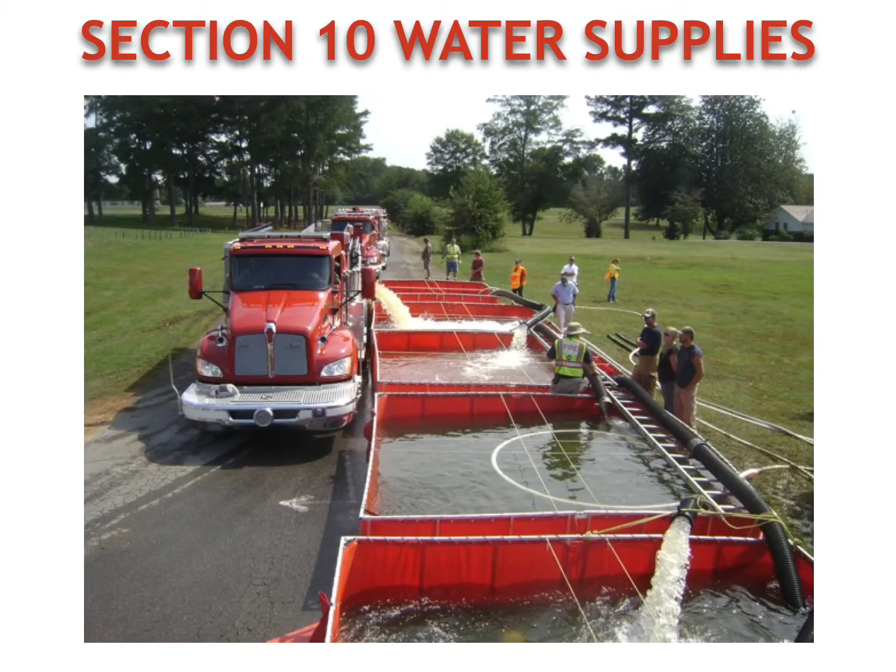Hello and welcome back to Granbury Volunteer Fire Department's online fire academy, and today we're going to cover section 10, water supplies per SFFMA. Again, I am Matt Hohan, captain of operations here at Granbury, and if you have any questions, make sure to write them down.

We're going to jump right into this slideshow. Let's take a look at your very first picture. This is a pretty serious water shuttle operation, and unfortunately, you're never going to see anything like this in Hood County. The best that you're ever going to get is nurse tanker operations, and the way a nurse tanker is set up is you have one dedicated truck that you're pumping from, and all the other trucks will pull up, offload their water to the nurse tanker, and then they'll depart to go refill.

It's been a really long time since I've seen drop tank operations here in the county, and maybe after discussion not only here in our rookie school but at our home departments, maybe we can pick this back up sooner or later. Without further ado, water supplies starts now.

Identify the water distribution system and other alternate water sources in the area of responsibility. So the first thing we're going to look at is this bottom right slide, water supply distribution system. And we're going to start at the source. And Granbury has two water sources. One, we have Lake Granbury, and two, we actually have city water wells outside of the city. That water from the lake and from the water wells is piped and pumped to the treatment plant. Once it gets to the water treatment plant, it is then piped and pumped to our storage tanks and throughout the system as a whole.

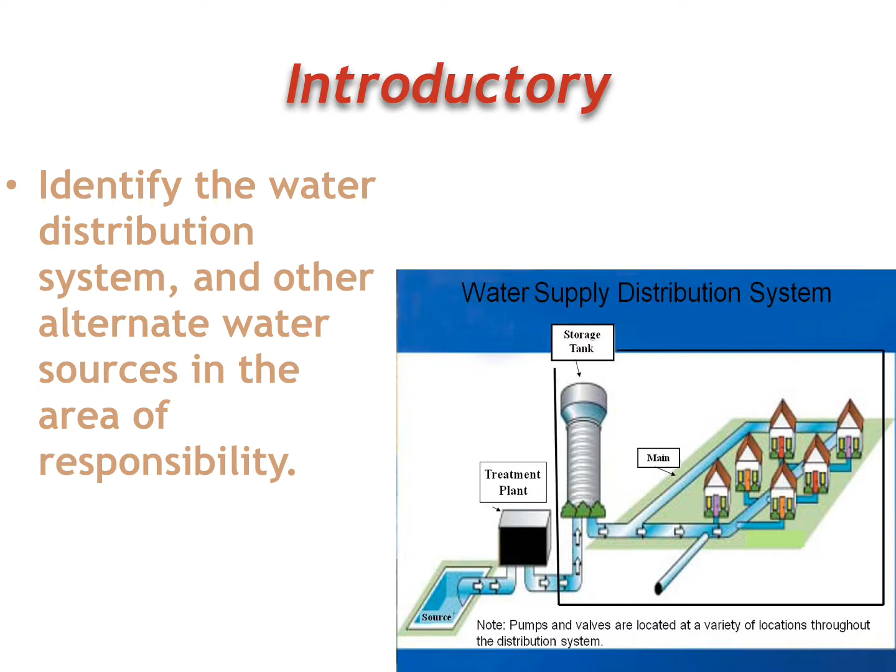Identify a dry barrel and a wet barrel hydrant. Now I'm going to tell you this, there's a major difference between a dry barrel and a wet barrel hydrant. One has a valve that is located below ground level, and that's going to be the dry barrel hydrant, and a wet barrel hydrant is going to have a valve that's basically operated at the top of the hydrant. And that valve is physically what opens and closes and allows water to come out of that hydrant.

And my question to you is, why do we have two different types of hydrants? Why does one have a valve that's buried in the ground, and why does the other one have the valve at the top of the hydrant? I want you to see if you can figure this out and write your answer down and come back for the answer.

The difference between a dry and wet barrel hydrant is freezing locations. Any place that has any potential of a freezing level in the ground, they will have a dry barrel hydrant. A wet barrel hydrant is primarily going to only be used in locations that don't freeze. Prime examples of the places I have seen wet barrel hydrants are Florida, very far south Texas, and New Orleans.

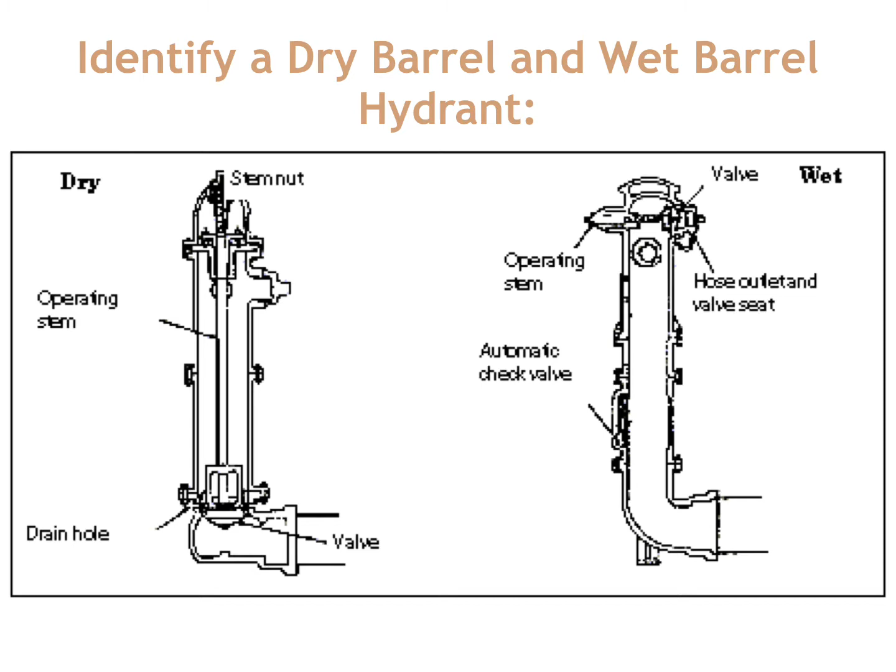Hydrant to pumper hose connections for forward and reverse lays. Okay, a forward hose lay is when the fire truck physically connects to the hydrant and then drives to the scene. So the truck pulls up next to the hydrant, a firefighter gets out, he grabs the hydrant hose, the supply line, and starts to connect it to the hydrant. From that point, the fire truck is going to actually finish making scene, and they're going to pull up in front of the structure. That is a forward hose lay.

A reverse hose lay is when the fire department pulls up on scene, they pull their hose off that they need, they pull the supply line to the scene, and then they send the fire truck down the road to the actual hydrant. Now, a split hose lay is best explained by looking at the bottom right picture. And you can see that you have two different fire trucks at the same intersection. And the purpose of this is one truck's going to be at the hydrant, the other truck is going to be pulling up to the structure, and the common meeting point is the intersection. That's a split hose lay.

Now, to go in a little more detail as far as what hose lays we use here in Granbury and in Hood County, I don't know if I've ever seen a reverse hose lay or a split hose lay used. For us, we use a forward hose lay, and we'll go in great detail on the skills night on how to set that up and then ultimately send the truck down the road to the scene.

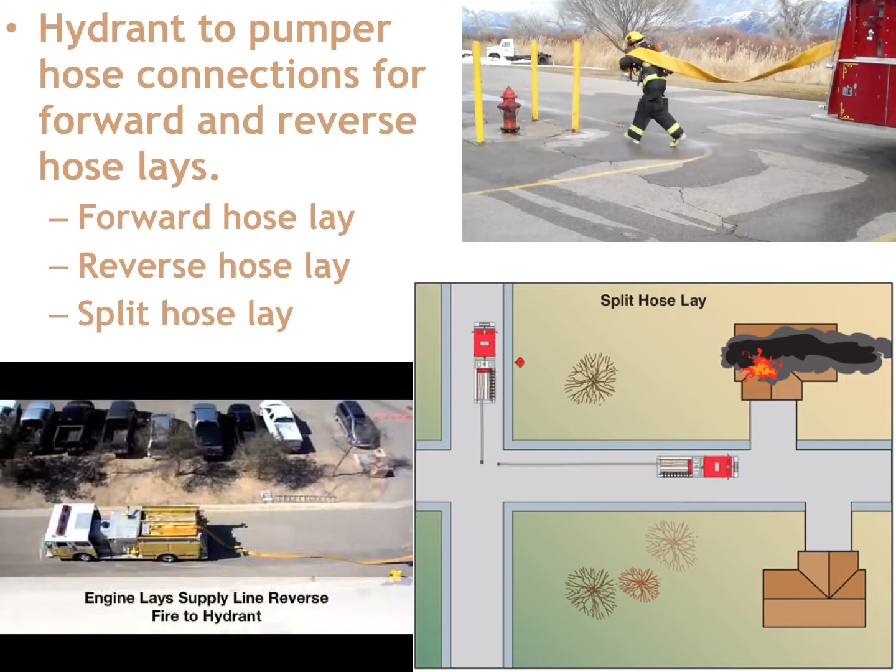Use of a rural dry fire hydrant system and static water supply sources. I do not know of any rural dry fire hydrants that sit out in the county. What I do know that sits in the county is there is storage water tanks around the county, and some of those tanks do have Storz fittings to be able to physically connect the truck to the tank. And it is gravity and water pressure that's used to fill the fire apparatus.

Now, static water supply sources, they're unlimited in the county. And examples of static water supply sources could be a swimming pool, the river, the lake, a pond, and any other potential source that's holding water. All it has to do is hold water, and that is a static water supply source. Take a second, and I want you to write down at least one water source that you know is a static water supply source in your service area. Go ahead and write that down.

Tanker shuttle. Now, what you have seen right here in this picture is a pretty advanced water supply and shuttling system set up. And what you barely see at the bottom picture is a light bar. That light bar is connected to an actual fire engine, and that fire engine is the one that's maintaining each one of those 4 drop tanks.

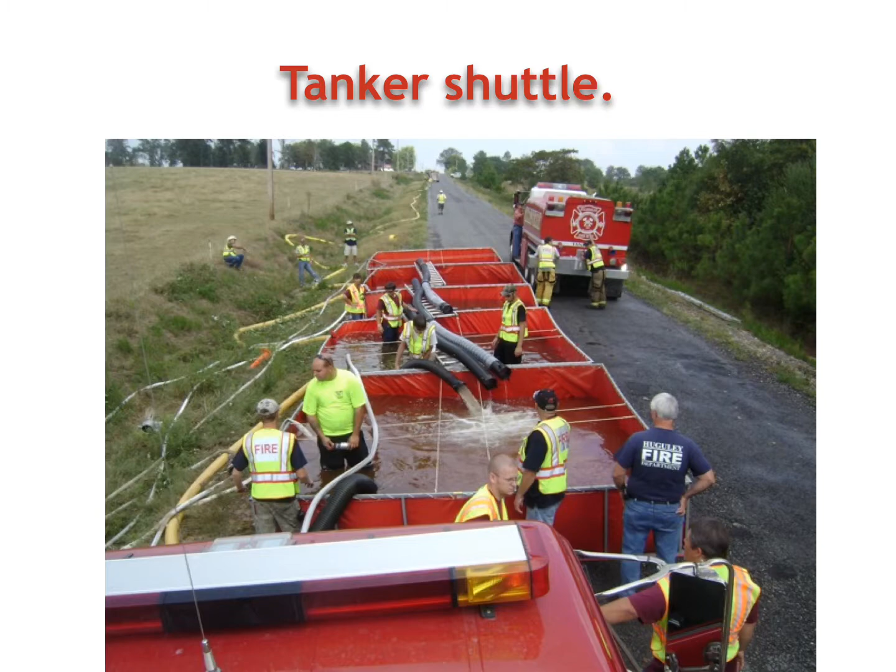Tanker shuttles is something that's entirely different to each region that they're operating in. And it really is. It's something that's kind of cool to look more into. But from a Hood County point of view, we keep it pretty basic. Provide water at rural locations by relay pumping, large diameter hose, and/or tanker shuttle.

First thing I want to talk about is relay pumping. Let's say you're doing an incredibly long hose lay. Let's call it a mile long. Well, one engine pumping a mile long worth of water, by the time that water gets to the end of that hose, there's not going to be much pressure in it.

So you're going to have to start putting pumpers in between different sections of the hose in different stages. And that's just to help boost the pressure so you can get more water faster at the actual scene of the structure fire. And you do that just because the pressure decrease over really long stretches is too much. And on an example of a mile-long hose lay, you may need a total of 4 engines for that hose lay.

Now, large diameter hose, we want to use large diameter hose because at the end of the day, we want to make sure that the true pumping engine on scene of the fire has more water than what it needs. And then, of course, we've already talked about tanker shuttles. And again, guys, if you have any questions or you need clarification on how tanker shuttles work, always ask in your home department first. And if you have any other questions, bring them back to class.

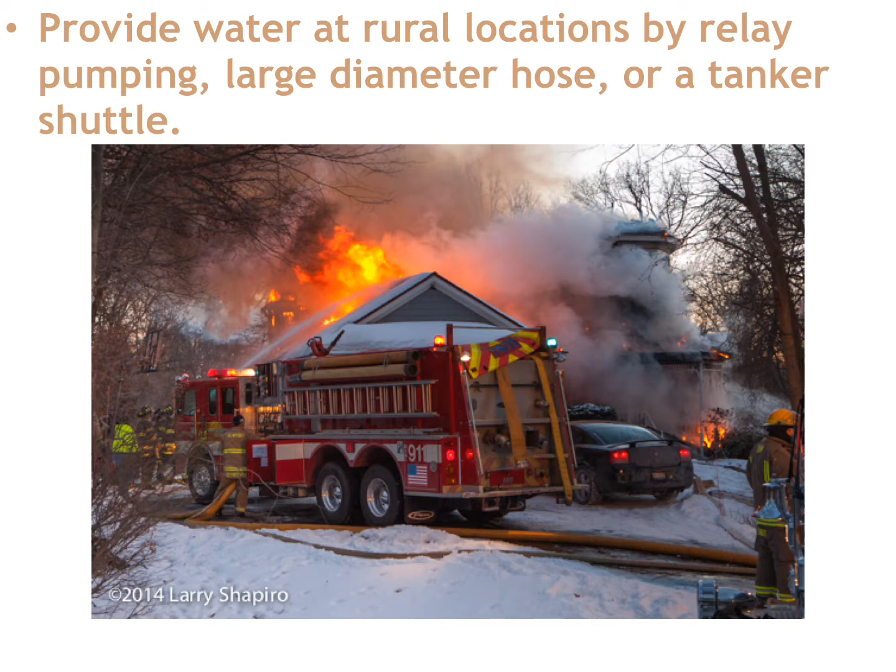Deployment of a portable water tank. We will do this in our skills class, and you guys will know how to set up, fill, and ultimately drain a portable water tank.

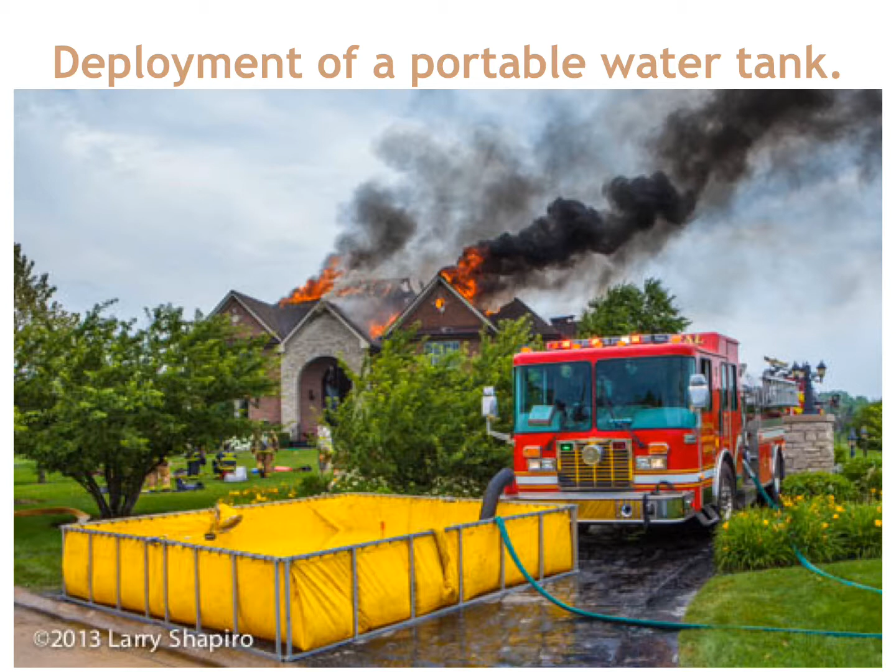Identify the following parts of the water distribution system: distributors, primary feeders, secondary feeders. We're going to start with the feeder pipe, the primary feeder. It's also known as your main water pipe or water main. And the places where a water main is going to be run is down 377, 144, Acton Highway, 51 North, any major road. Okay. Now, any major road is going to have smaller roads that break off of it. And down those smaller roads, under those roads, is where the secondary feeder pipes are going to be at.

So the example I'm going to give you is that you're down 377. That's where the water main's going to be at. And then if you turn down Water's Edge and you start to go towards the community down Water's Edge, you'll be following the secondary feeders. Once you continue down Water's Edge Road, you'll get to smaller side streets that actually break off and go to little cul-de-sacs and just dead-end roads. And that's where your distributor water pipes will be at. And those are the pipes that are running to houses.

Now, one thing to take note of real quick here is your water main, that's a large water pipe. Minimum 14 inches. And I know next year Granbury's going to be upgrading to 16-inch water mains. Now, your secondary feeder pipe, that's typically a 12-inch water pipe. And then finally, your distributor pipe is an 8-inch pipe.

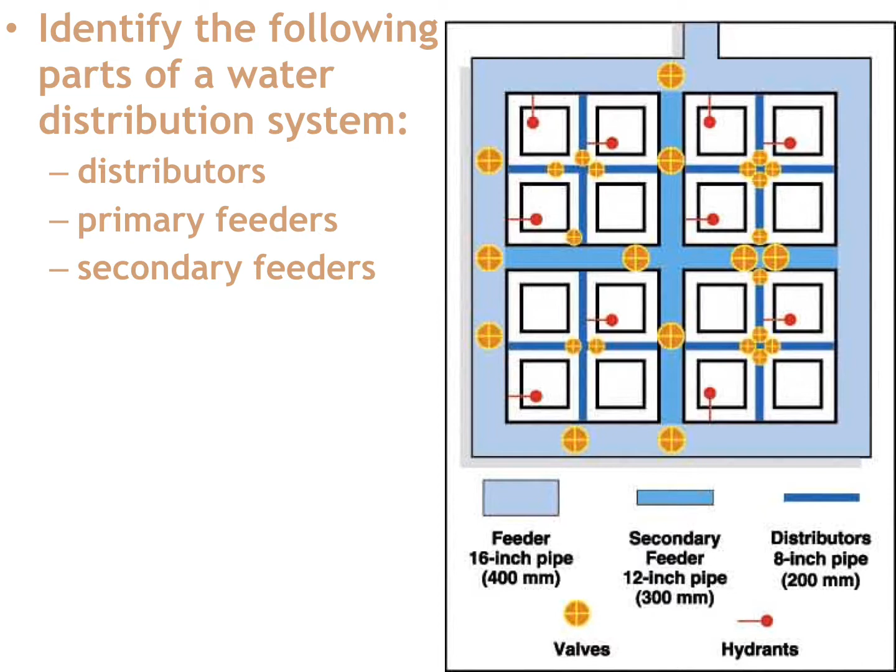Now, per the requirements of SFFMA, terms as they relate to water supply. Normal operating pressure of a water distribution system is just the pressure that's needed to physically be able to flow water through the system and ultimately have water come out the tap. And you want to be on the low side of that pressure that actually gets water to flow through the house. Now, you need to be able to physically fill the water tanks in the house quickly, but you also don't want a water pressure system so high that when you go to turn the water faucet on, it blows the coffee can out of your hand.

Another thing to consider is the residual pressure of a water distribution system. And this is the pressure that's in the system once the water's physically flowing. If there's no water flowing, the pressure will rise and cap out, and that's going to be the normal operating pressure. The residual pressure is when the tap is open and water's physically flowing through the line. There will be a pressure drop. The flow pressure is from an opening that is flowing water. So that's a pressure that's directly taken as soon as the tap's open and the pressure coming out of the tap.

And lastly, static pressure. The best way to describe static pressure is imagine having a milk jug filled with water. If I poke a hole in the very top of the milk jug, the water's barely going to trickle out because the weight of the water above is very light. There's almost no weight there. The static pressure is very low. But if I take the same pin and poke a hole at the very bottom of the milk jug, the water is going to squirt out with quite a bit of velocity. That's because there's a lot more static pressure sitting above the opening.

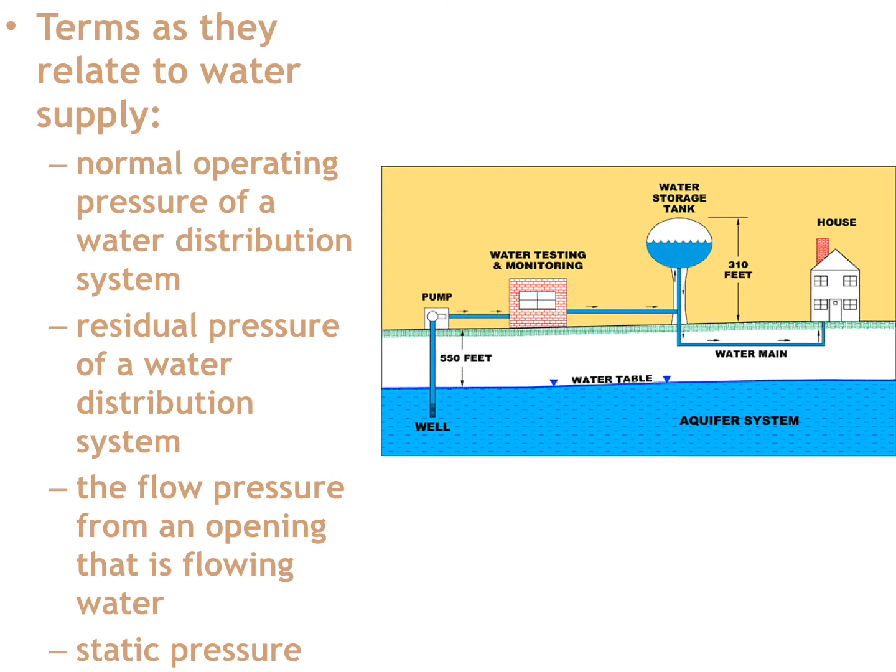Following types of water main valves. An indicating water valve is going to show you whether the physical valve is open or closed. Okay? What I mean by that is it's going to physically tell you with some type of identification marker on the actual valve as to which way the water is flowing. Now, a non-indicating valve would basically just have a twisting nut on the top of the valve, and you would have to physically turn the nut, lefty-loosey, righty-tighty, to know if the valve is open or closed.

Now, a post-indicator valve has a literal swinging flag, and if that flag is vertical to what the water flow of the pipe should be, then the valve would be closed. And if you spin the valve, that flag's going to turn and align itself with the flow of water, and that's going to indicate that the water's flowing through the valve.

The last type is an outside screw and yoke valve, OS and Y. The easiest way to remember this type of valve is the physical threading on the outside of the pipe, and it's what the twisting handle spins down. If the handle is spun down to the bottom and it's showing a lot of screw threads on the outside of the OS and Y valve, that means that valve is open. If you spin the handle and there's not many threads showing above the handle, that means that valve is closed.

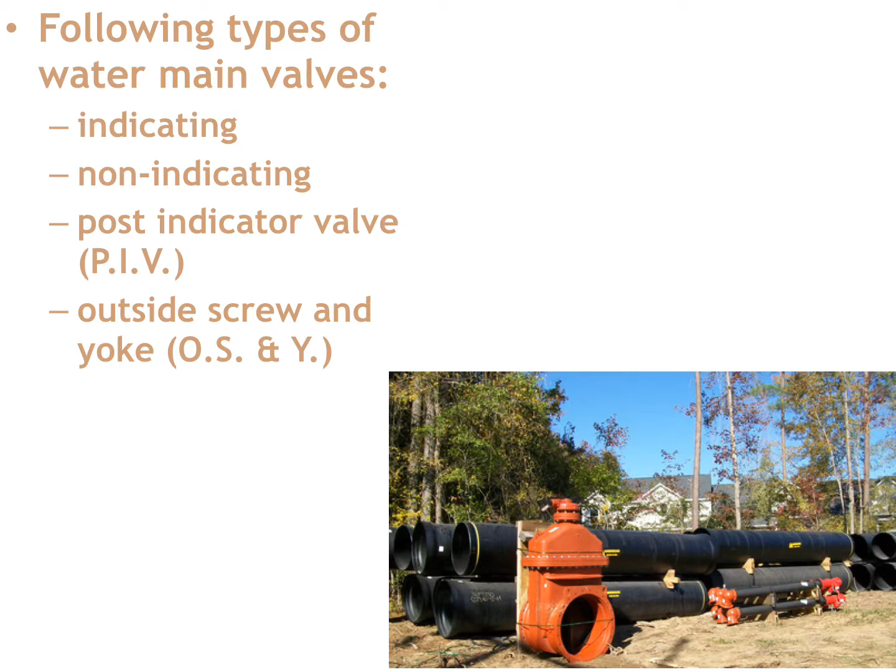Explain the 4 fundamental components of modern water systems. The sources of supply. So is our water supply surface water or groundwater? Again, in Hood County's case and in Granbury's case, it's a mixture of both. The means of moving water: direct pumping system, gravity system, or combination system. A lot of this has to do with the physical terrain where the water system's located. If you're in a very flat area, you're going to have a direct pumping system to bring water from the treatment plant to the water storage towers, and then from that point, gravity will take over.

But if you're in a mountainous area, you're probably going to have a lot more of a gravity type system, where the storage for the city or town will physically be above their elevation, and gravity will do the vast majority of the work. At the end of the day, almost every city and every town out there has a combination of both.

Treatment facilities. The list is long and extravagant for this. And Granbury is a great example of this. We have chemical treatment, we have a desalinization plant, and the list goes on. At the end of the day, there's multiple facilities used for treating water.

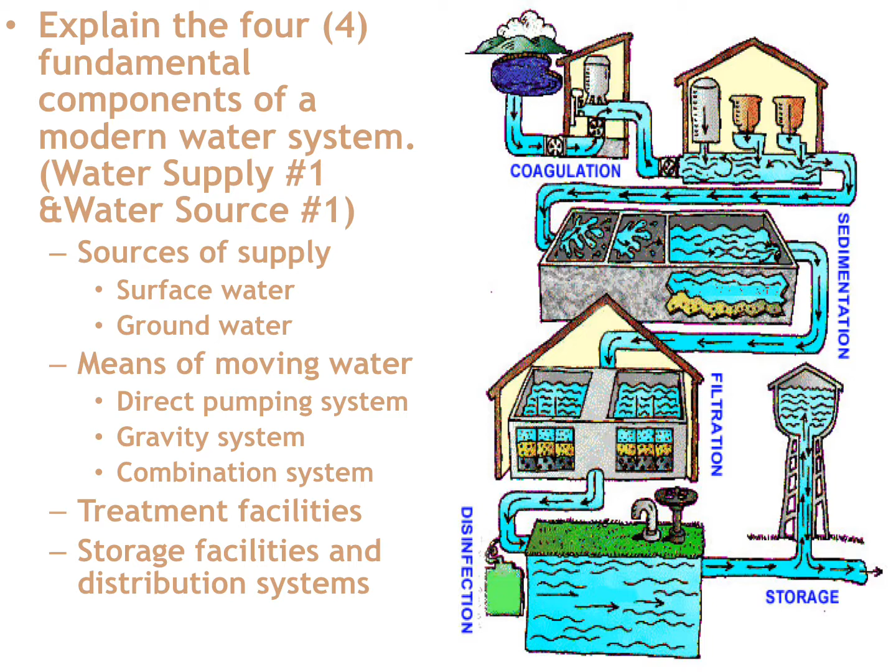Hydrant testing. The use of a pitot tube and gauge to read and record several flow pressures. So, insurance requirements require us to test hydrants occasionally, and then it's also just good practice to actually test your hydrant occasionally. And from a volunteer fire department's perspective, the question is time. How on earth do you find time to actually test the hydrants in your town? Well, a lot of that has to do with how many hydrants you physically have.

One thing I would tell you to consider from a volunteer fire department's perspective is if you have any hydrants in your area, you need to physically go out there and open those hydrants up at least once every year. Why do you want to do that? Here's why. Can you even open the hydrant? How long's it been since that hydrant's been open? I couldn't tell you how many times I've went to use a hydrant and it took 6 people and a 6-foot extension to be able to physically open the hydrant, only to break off the valve at the stem. Testing your hydrants is critical.

And as far as making sure the hydrant opens, that's only half the equation. We ran into this in Granbury in January of this year. If you're at a location with a hydrant and you get it open, what kind of water pressure are you getting? If the truck pumps on an average of 1,000 gallons per minute and you're only getting 200 gallons per minute while the hydrant's open, is that doing anything for you? The answer is no. Testing your hydrants is critical, and the actual procedures that are used for testing hydrants in your area, I want you to get that from your in-house officers and your firefighters at your home stations.

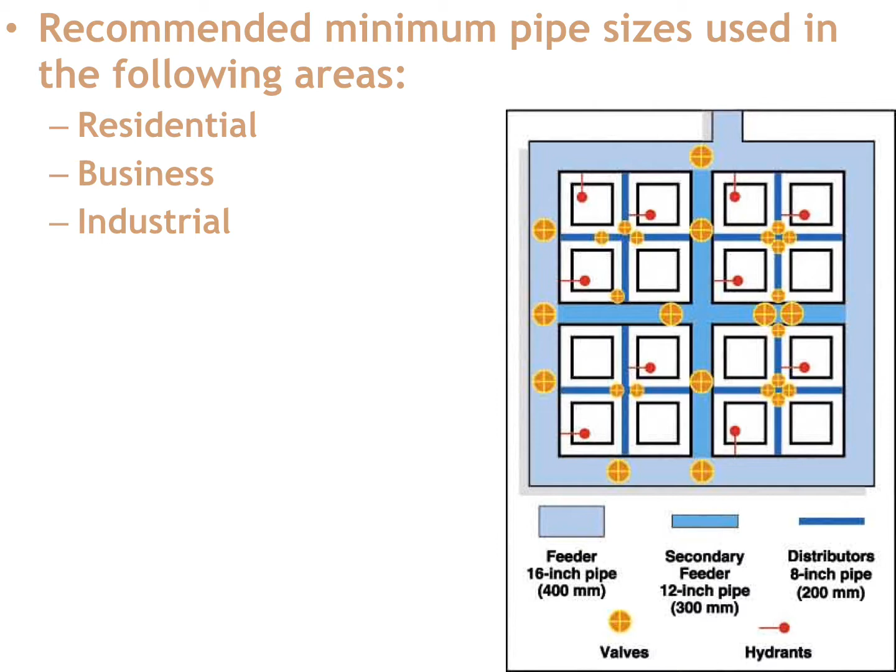Two causes of increased resistance or friction loss in water mains. The first one, mineral incrustation or tuberculation. Real fancy word there. All we're talking about is if you have hard water, over time, it's going to crust up on the inside of the pipe. Why is that bad? Because ultimately that's going to reduce the diameter of the pipe, and as you decrease the diameter of the pipe, you're decreasing the physical volume of water moving through the pipe, and it's going to require more pressure to move a given volume of water through the pipe.

Secondly, sedimentation. Both of these are actually very common in Granbury. Not only do we have crushingly terrible water, but at least we have dirty water and lots of sand. Sedimentation occurs as the pipes get old and degrade. They're going to start cracking, and dirt is literally going to start falling in through those cracks, and it's going to start filling the pipe. If you have any questions, make sure you write them down and ask them in class.